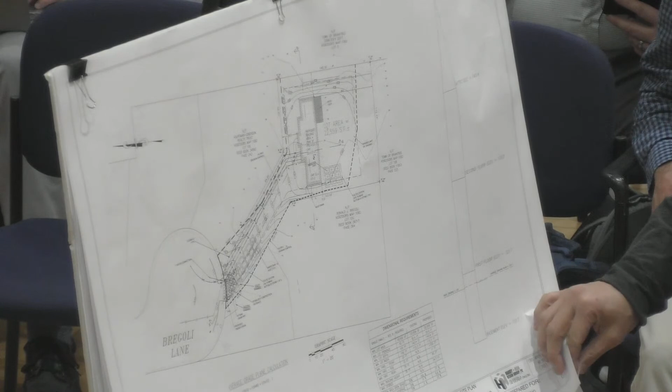From the last revisions on the original plan submitted, we have revised the site plan basically to address the DPW comments. There were a number of comments related to sewer and water connections to the site, and also comments that we need to go get a stormwater permit. So we added notes on the plans that they are required to get a stormwater permit, and we also designed the sewer and water connections.

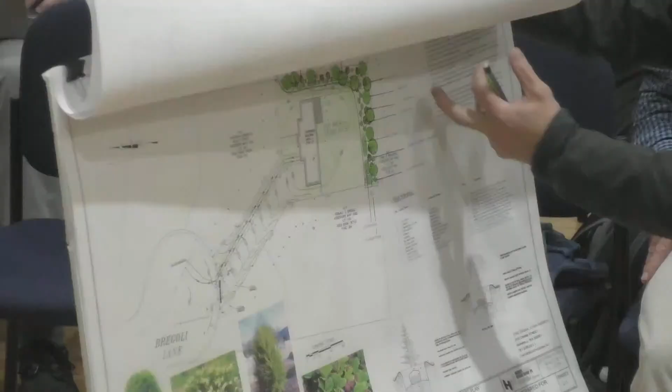As far as the landscaping plan, we have submitted a landscaping plan. On the last submittals, we quantified 19 trees being removed from the open space buffer area. In the new plans, we have added 6 more red maples, so a little bit more than the 1-to-1 ratio that was presented at the last meeting.

One of the comments we had was from Mr. McCamey, asking how big the building is, what's the square footage. Unfortunately I didn't have that number last time, but we've gone back and measured the architectural plans. The deed restriction on this lot requires a minimum 3,200 square feet of living area, excluding the garage, basement, and mechanical space. As measured from the architectural plans submitted with the application, there's approximately 3,290 square feet.

So the building itself is designed to the minimum of what is required. We are not trying to build a huge building on this lot. Just to clarify that. Other than that, I'm open to any questions the board may have.

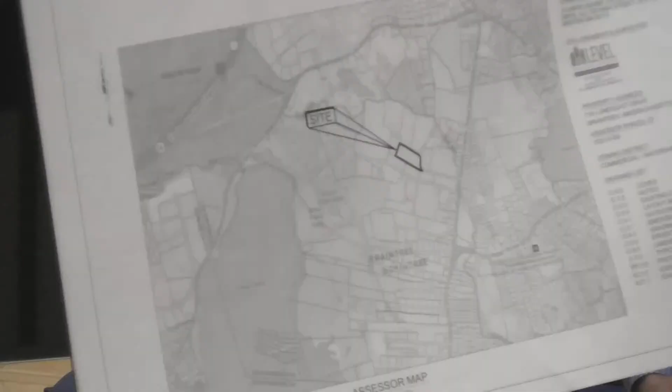It's in the commercial zoning district with watershed overlay. The property has an approximate 42,000 square foot building that was constructed in 1967, so over 45 years ago. This is the type of improvement, as the assistant director pointed out, that we like to see in these types of 1960s industrial parks. This is an improvement of the stormwater system, and also to the westerly part of the site, there is a hard-packed gravel area, and we're taking that area and paving it and installing new stormwater treatment. That area is approximately 50,220 square feet.

There's no modern stormwater management system, treatment or controls, and the proposal is to pave that pre-existing gravel packed area, install a state-of-the-art stormwater management and treatment system that complies with DEP stormwater management standards and best practices. All in all, it will be a neater truck storage and equipment storage area than currently exists, and will also protect the interests of the watershed overlay district with the new stormwater controls, infrastructure, and treatment.

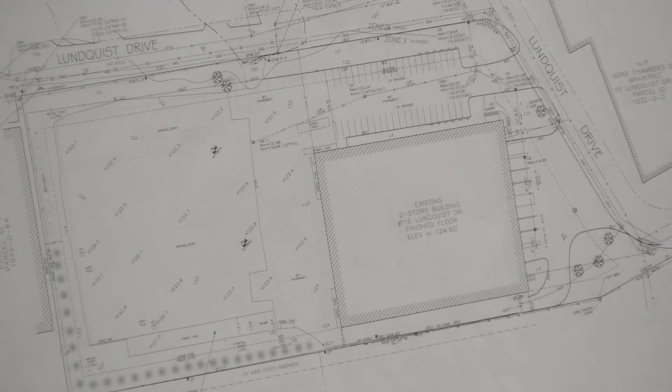So we also have gone to the zoning board, which we reported last time, and we have less lot coverage, as we showed on that composite exhibit that we had, than 13 out of the 17 surrounding properties in the industrial area. So our lot coverage is 74%. Our open space is up to 26%, which we increased from 23% with this project. That's all good, and normally in the commercial area you can cover 75% of the lot. We're still below that. It's the watershed that was adopted in '82, pretty much years after this site was used as compact area and storage and so forth.

So we did go to the zoning board. We did get that relief anyway, even if there were pre-existing rights. The fact is 60% is the new dimension in that area for lot coverage, and 40% open space. And in getting that relief, we're still superior in terms of open space and minimizing the lot coverage to the extent possible.

So I know that we had a call last week with Nick Fasendola. Nick is the project engineer from Level Design. We had a Teams call with the assistant planning director, and also Eric Dias, who's here. Eric is from Strong Point, as Mr...

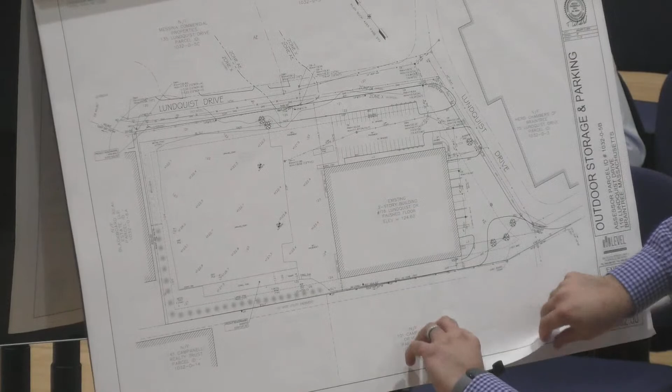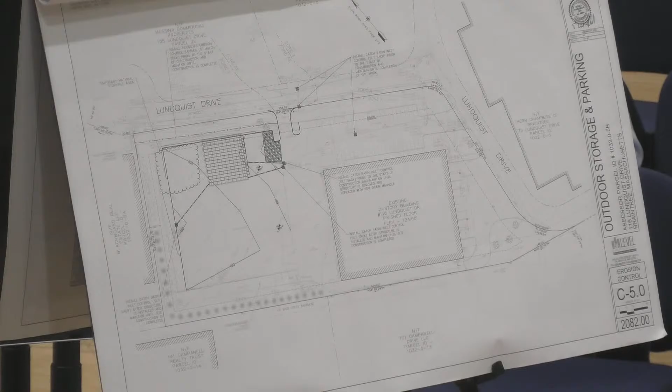In that area is the proposed subsurface infiltration system. As Mr. Dias stated, we don't anticipate any variation. The grade is very consistent throughout that level, so there won't be any huge variations in groundwater. The material is consistent from the two test pits, which are about 80 feet apart. So we're requesting that the board allow us to maintain those test pits with confirmatory inspections during the construction process.

I always require that I do a bottom of hole inspection myself on any system being installed under my supervision, so I'll be out there doing inspections when this is constructed. We'll do one inspection once the hole is prepped and any unsuitable material is removed from the site, and then I'll do a second inspection when the stormwater system components are installed. We'll do an as-built survey before it's backfilled, just to confirm everything has been installed properly at that point.

So we would like the board to consider allowing those two test pits. Other than that, there were no other items that we opposed, and we'll work on getting a comment response and revised plans within the next week or two to the board. Great, thank you.

Assistant Director Murphy, do you have any feedback on the test pit question? We discussed this, the director and myself, and we believe that a conditional test pit prior to the start of the authorized activity would be acceptable in this situation.

Thank you. Going to board comments first. Member McCamey, any questions? No questions, thank you. Member Kent? No questions. Member Grove? Thank you. Member Sterlesi? No questions? Member Conley? No, thank you. Okay, thank you. I don't have any questions either.

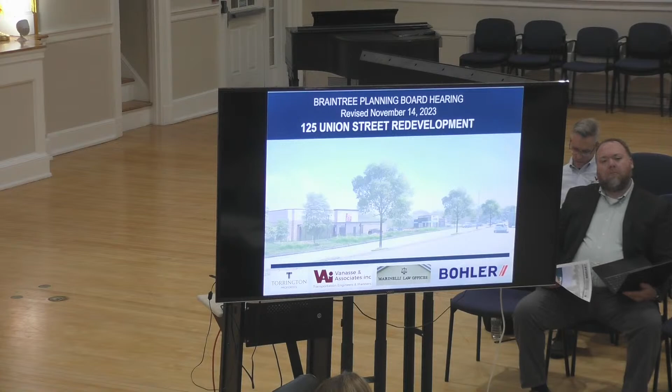The redevelopment program is less than 20% of the blighted building mass that currently exists on the site, which would be demolished when final redevelopment approvals are issued. In addition to over 650 plantings and complying with open space, the redevelopment also includes on-site drive-through stacking capacity of 55 to 60 vehicles, which exceeds on-site stacking capacity of any similar use one can think of in the area. That kind of site characteristic is extremely appropriate for the proposed use, and has stated $1 million in off-site improvements that will make the existing intersection function better than under existing conditions, as Jeff would tell you and has stated in the memos.

The zoning process is site plan review. Torrington's proposed tenants are 2 uses by right in the highway business zone, Chick-fil-A and Brookline Bank, both notable brands that Braintree can be proud of. Site plan review, per Prudential versus Westwood, provides that site plan review approval is granted for uses by right with or without reasonable conditions.

So when you look at section 601, the table of principal uses, you will see that bank is a yes, an allowed use. You will see in section 601 that fast food is a use by right, an allowed use. There is no use discretion. Site plan review, as defined by the Supreme Judicial Court, is regulation of a use rather than its prohibition, contemplating primarily reasonable terms and conditions.

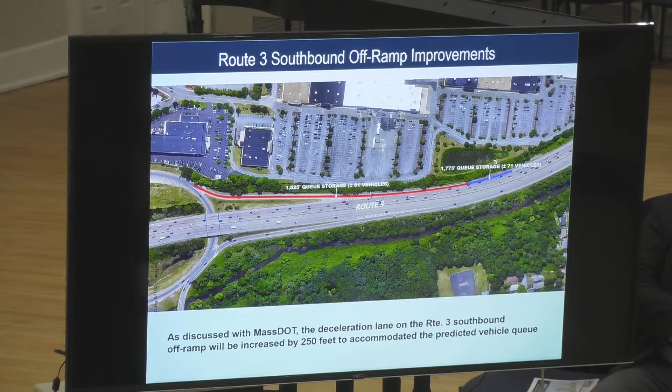So the next item as it relates to Article 14 is Condition B. Now we're moving from changes in level of service to traffic volume increases.

Condition B states that we have a certain percentage increase in traffic that is allowed on roadways that provide access to the project site. The measurement of those conditions is the same as we look at for level of service. We're required to look at no-build versus build condition, look at the percent increase in traffic, and see if it falls within the allowable range as denoted in Figure 1 of Article 14, Condition B.

The roadways that provide access to this project site we would deem as high volume roadways, so they would fall under Condition B at 10,000 plus vehicles per day. At that volume, a project is allowed to increase traffic up to 10%. That's the threshold limit.

We provided in our November 9th memorandum a detailed table that looks at daily traffic volume increases on each of the roadway segments in our study area, and you see that in great detail.

What you see in the table is that the only place we had exceedances, and again we look at the morning, evening peak hours, as well as weekday and Saturday conditions, the only time we had an exceedance was during the Saturday midday. It was not an average weekday exceedance.

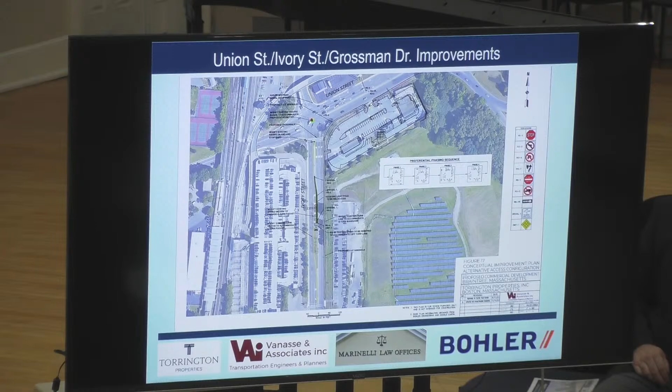Let's see if I can use this to move. So I'll come over here. The project site is here. I apologize for being in front of you. We spent a lot of time talking about these U-turn maneuvers.

Because of these U-turn maneuvers, there are 3 segments of roadway that, depending on where you're coming from, you have to traverse twice. So on a typical project, a vehicle would only pass a given roadway segment once, but because of the U-turn maneuvers here, it basically doubles the volume on that segment. It's unique to this site.

The area where we're showing the exceedance is Ivory Street, basically between Union Street and where the U-turn maneuver happens. If you're coming from the east and want to go to the project site, as we measure the traffic volume increase, you travel on this segment of Ivory Street once, reverse direction, and travel on the same roadway segment twice. So when you measure the volume of traffic, the same vehicle has to traverse it twice.

Some vehicles have to traverse those 2 roadway segments twice in order to get to the site and then leave it as well, because if you want to head back towards Washington Street, you exit the project site, traverse one leg of Ivory Street between the rotary, then go around the rotary and come back heading in the westbound direction. So the only reason we have the exceedance is because of these U-turn maneuvers, plus the fact that we have a median, so heading westbound requires using the rotary and coming back on this section of roadway.

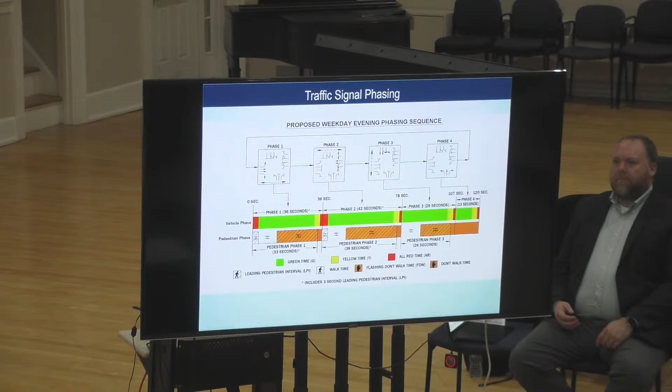As an engineer, these might seem complicated, but what I tried to do here, to the best I could, is look at various ways others might view the phasing of the traffic signal, more related to how the pedestrian phase works in relation to the entire traffic signal phasing. I tried to simplify it, and my letter describes various iterations you could look at for how the signal operates.

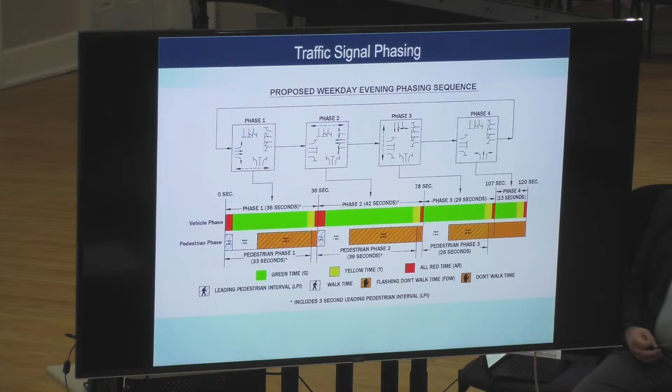The traffic signal here operates under basically 3 timing plans: a morning, an evening, and a Saturday midday timing plan. The amount of green time is different depending on the time of day the signal is operating. So you have 3 drawings that I provided for each of the time periods. This one happens to show the weekday evening timing.

These are the phases that the signal steps through. Phase 1 is Union Street toward the Rotary, which is the eastbound direction. Phase 2 is Union Street from the Rotary heading towards Washington Street, which is westbound Union Street. Phase 3 is Grossman Drive. Phase 4 is Ivory Street. The traffic signal controller operates logically, going through each phase in order: Phase 1, phase 2, phase 3, phase 4, and then back to phase 1.

Phase 1, eastbound Union Street, includes the pedestrian phase for crossing Ivory Street, which is why that happens at the same time as the vehicle movements. Phase 2 includes the pedestrian phase across Grossman Drive. Phase 3 includes the pedestrian phase for crossing the Union Street west leg of the intersection. Phase 4, Ivory Street, does not have a pedestrian phase associated with it.

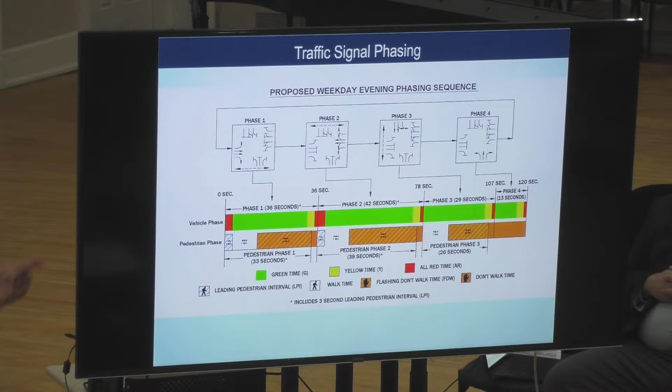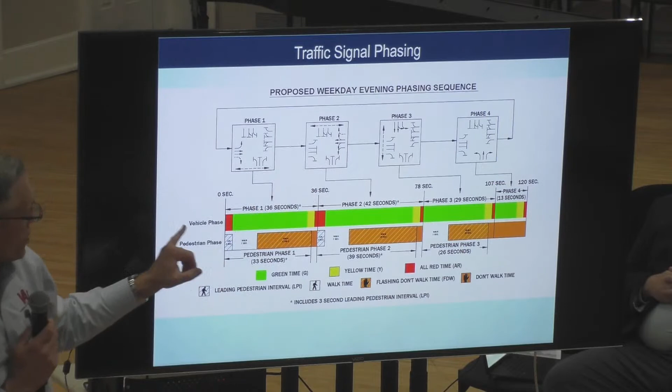When phase 1 operates, if you're a pedestrian who comes to the intersection wanting to cross Grossman Drive and you push the push button while we're in phase 1, you're going to see the don't walk symbol since it's not phase 2 yet. You'll stand on the corner at Grossman Drive and wait for phase 1 to progress. Phase 1 is a total time of 36 seconds, so you'll stand there for 36 seconds. After phase 1 concludes, the walking symbol comes up, and you'll be able to cross during phase 2.

You'll be able to cross the intersection for the full pedestrian phase time, which is 39 seconds, sufficient time to get from curb to curb, which is how we're timing the signal. Then you will have completed your pedestrian crossing.

If I'm at phase 1 and want to cross the Union Street west leg of the intersection, and I push the push button, I'll have to wait for phase 1 to finish and then phase 2 to finish before the walking symbol comes up. Phase 1 is 36 seconds, phase 2 is 42 seconds, so I'm going to wait 78 seconds before I can cross the intersection.

You can look at various iterations of when you push the button and when the phase comes up allowing you to walk. All you need to do is add up each of these times to determine how long you have to wait at the intersection. The important thing is the longest wait time is about 82 seconds, something like that, depending on where you push the button and the combination of phasing that happens.

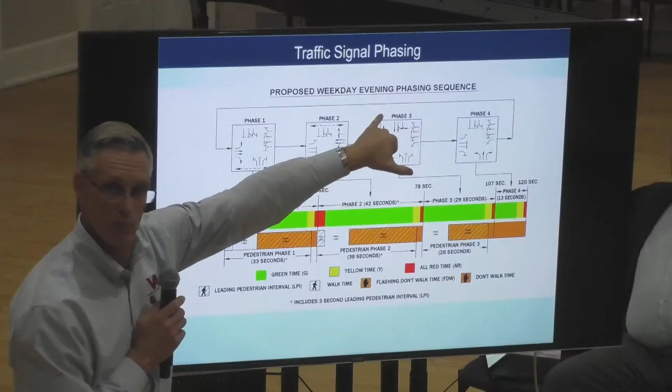One thing that's important to mention is if you hit the intersection at the right time, say I wanted to cross from one side of Grossman Drive and then come across the intersection. If I get there at the right time, in phase 2, and push the button, I might be able to walk from here to here, then push the button again and get across the intersection. There's a possibility with concurrent pedestrian phasing that, depending on where you're going, it's quicker to get through the intersection than if you used exclusive pedestrian phasing, where once you cross one leg, you can't cross again until it goes all the way around to the beginning of the cycle. Whereas in this situation, there's the opportunity for a shorter wait time to cross the intersection.

Again, we provided these same diagrams for each of the peak periods so you can look at various combinations, add up the time, and figure out how long it would take depending on where you push the push button in the signal cycle.

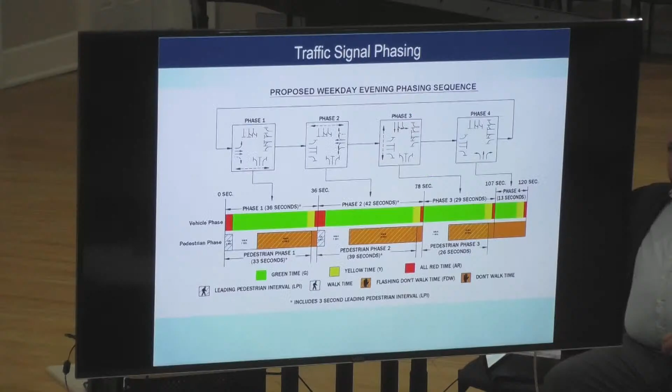So that concludes the new information that we provided, and I'd be happy to answer any questions you have now or later on this evening.

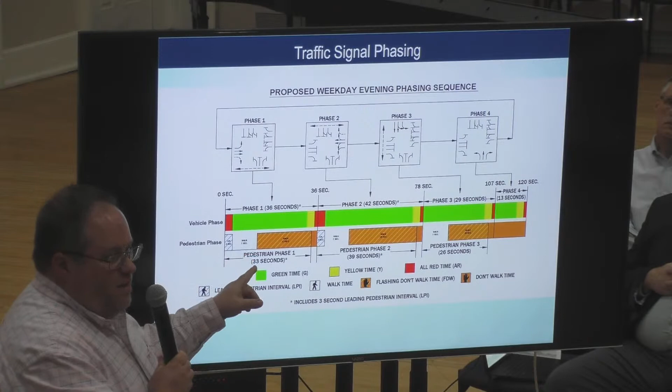I'll just go over here and point something out. What's important to understand is that these white spaces represent the walk phase for each approach. That's the point where the walk signal comes on if you push the button for that approach. So it's wholly dependent on where you come in on this timeline—think of it as a continuously running timeline. It depends on when you push the button and how that relates to the specific walk phase for the crossing you want to use.

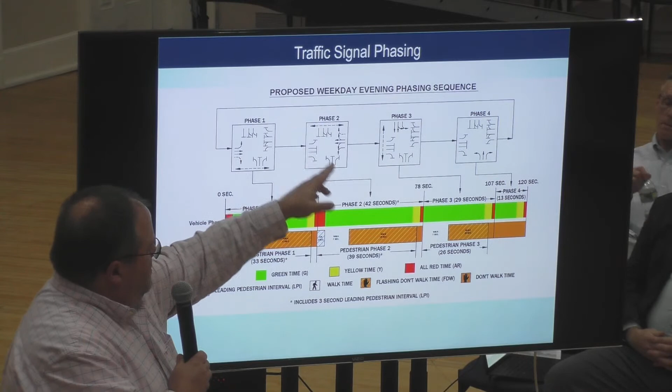For the letter regarding the Article 14 compliance, it was well stated how you would approach this, and it was true what Jeff said, that I would approach this the same way any competent traffic engineer would. When you're looking at an intersection with capacity issues and you're retiming and balancing that capacity, there may be approaches that don't necessarily have a capacity issue, where you might slightly degrade level of service because it operates acceptably today. So that balance could be some gain, some degradation, but overall gain. And that's what's happened here.

The information presented in that letter is consistent with the information presented in the traffic study, the information we had previously reviewed, and is accurate to the impact of the project. As far as the overall increase over 10%, also accurately stated, and the mitigation measures can help reduce that impact. We're talking about small numbers in terms of what it would take to reduce that below the 10% threshold. So we didn't prepare a formal review memo for this because there wasn't anything to comment on. We were in agreement with things presented, and I hope my explanation helped provide some more clarity for the board, but I'm happy to answer any questions.

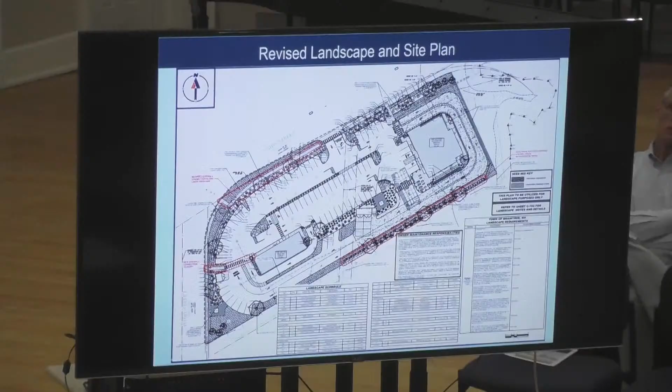From my perspective, I'd rather see easier pedestrian access than the landscaping, although I like the landscaping. Is it possible, even if it's not put exactly where the landscaping is, sort of behind where the dumpster is going to go, to put another sidewalk in there? Or does the bank drive-through make that problematic?

Yeah, you're right — the bank drive-through wraps around the south side of the building, and you also have the double drive-through queue for the Chick-fil-A. We don't want to enter more pedestrian activity through that queue, just because you already have the vehicles there and employees doing remote order sessions. So the intent is to keep the flow directly through the parking field, straight to the front door as quickly as you can.

Before I move on to questions, does anybody else from the applicant team have anything, or should I move on to questions? I think we've provided everything that we have. Okay, thank you, thank you.

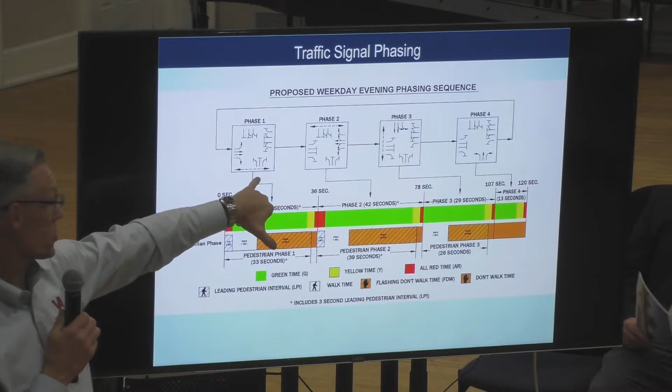Okay. Where is Ivory Street in this? Yes, originally. So north would be straight up as you're looking at these. So Ivory Street crossing occurs during phase 1, when the eastbound Union Street movement is happening. Okay, so I looked at this wrong. Yes, I thought Ivory Street was phase 4, but okay, I hear you.

Okay, how long is the pedestrian light? Is it 30 seconds? The total time that a pedestrian has to walk is 33 seconds for that phase. So when the number is flashing, what number is that? You're going to see it count down for 33 seconds. I'm going to see 33 seconds? It's going to slowly step you down to 0 starting at 33. I'm going to see 33, which seems unusual to me, but okay, 33 down to 0. Yes. Got it. Okay, thank you.

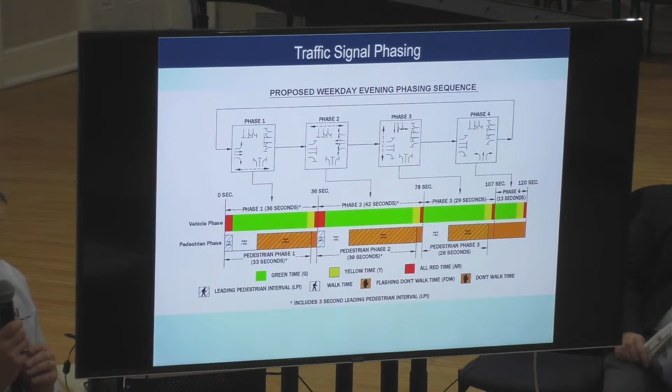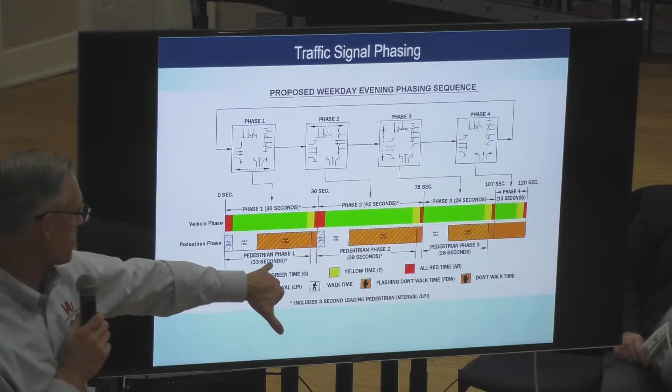And so are all these lights 33? No, because it's 33 for this one. The total pedestrian time for phase 1 is 33 seconds to cross Ivory Street. It's 39 seconds to cross Grossman Drive because it's longer and wider. And then it's 26 seconds to cross Union Street because it's shorter. The width determines how long it takes to step from curb to curb, so as each length gets wider, you need more time to cross. That's why the phasing time changes. Okay, that actually was the number I was looking for last time. Okay, 33 seconds, perfect. Yes, thank you.

And if no one hits the pedestrian walk button, what happens? It just stays as the don't walk. Okay, no, I understand that, but in terms of the lights and the sequencing for the traffic.

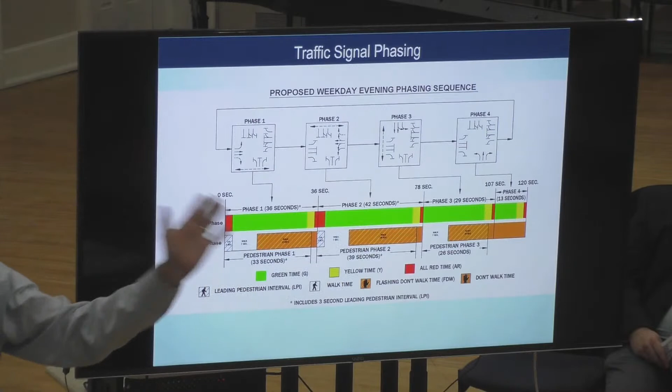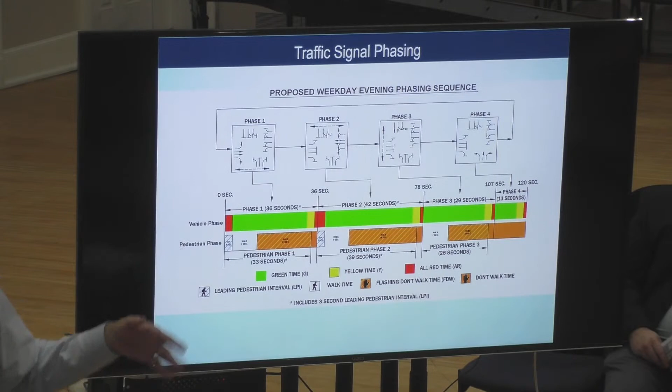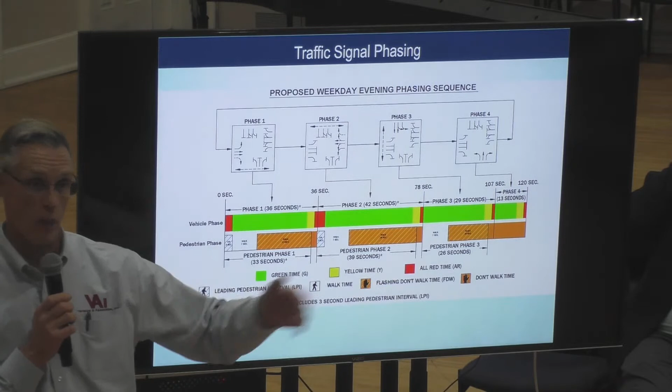So what you would look at is that if there's vehicles always at the intersection, there's always somebody waiting, this is how it would work. Because the signal is dynamic, it will change. So if there's a condition like right now, let's say, and there's not a lot of traffic coming out of Grossman Drive, it will keep the green on the approach that has demand. So if there's always traffic on Union Street, it will stay green on Union Street until a car pulls up to Grossman Drive, and then it will detect the car and say, okay, there's a car waiting, so I'm going to move myself around and call the Grossman Drive phase.

So what can happen is if a pedestrian doesn't push the button, and there's also no traffic coming on Grossman Drive, it'll stay green on Union Street until a vehicle pulls up and is detected by the traffic signal. So this, when you're looking at this, is basically the way the signal would operate during the morning rush hour, when there's traffic all over the intersection. When it's not a condition where there's always vehicles on an approach, it stays green until a car comes up or a pedestrian pushes the button, and then it reallocates the time. So if 36 seconds aren't needed, whatever time is not used goes to the next phase. That's the way it works.

Okay, I was actually looking more at the evening phase, but that's okay. So, alright, so we understand the phasing. So what you're telling me, and tell me if I'm incorrect, is that this is the way the signaling would work for pedestrians walking. Correct. But if nobody hits the button, the light sequence for the cars could be slightly different. Exactly.

If you stood out there with a stopwatch and tried to replicate this, you probably wouldn't, because the signal is dynamic. And so the other thing that it does is if there's only 10 cars on Grossman Drive, let's say, it's only going to give enough time for those 10 cars to get processed.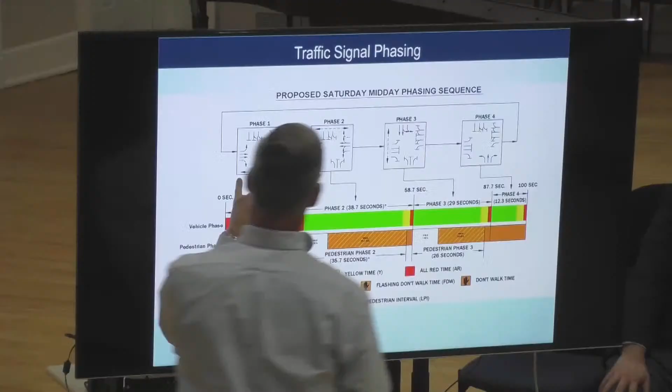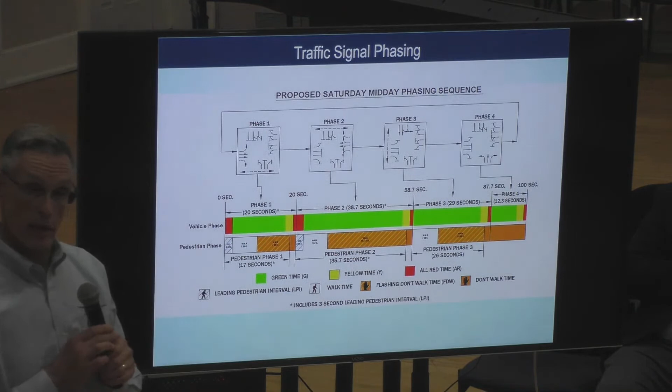Sure. So what we had talked about was, because when we have these concurrent movements happening, one of the things we discussed was a dynamic sign that would say 'no turn on red' when the pedestrian push button is activated. That can be added into the signal phasing or the signal system, so that if no pedestrian pushes the button, it just allows those right turns to happen. But if a pedestrian pushes the button, a blank-out or fiber optic sign comes on that says no turn on red when a pedestrian's there. That's something that can be incorporated into the signal system and activated when a pedestrian pushes the push button.

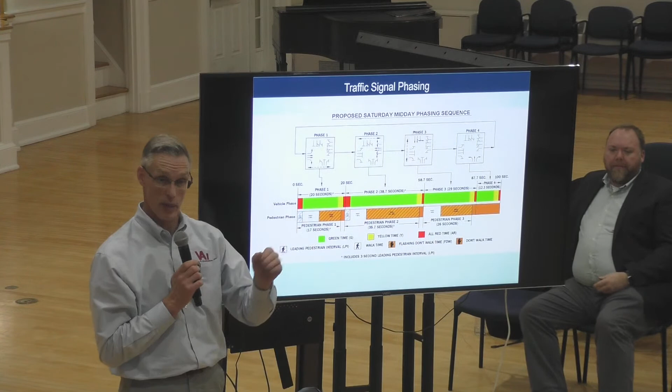Okay, and then that's something different than just making it always no turn on red? Exactly -- it would allow right turns on red to occur, except in the instance when there's a pedestrian crossing, in which case the sign would light up saying no turn on red because there's a pedestrian crossing. So that's an option that can be added into the signal system. Okay, all right, thank you.

What else -- I had one more question on the sidewalk extension. I know there were some comments on that -- it requires coordination with the town because it goes over town property. I just wanted to see if you could explain how that typically works, like the process of understanding the sidewalk and getting whatever approvals are required. So I think it's really not uncommon.

It's similar to if a sidewalk's on private property where there's an easement granted for that to take place. So in this case, for the developer to construct the sidewalk, we would need permission to enter upon town property to construct the sidewalk. And to the extent that a different town entity may own the sidewalk, they would need to grant an easement to allow for the sidewalk to be constructed on that property.

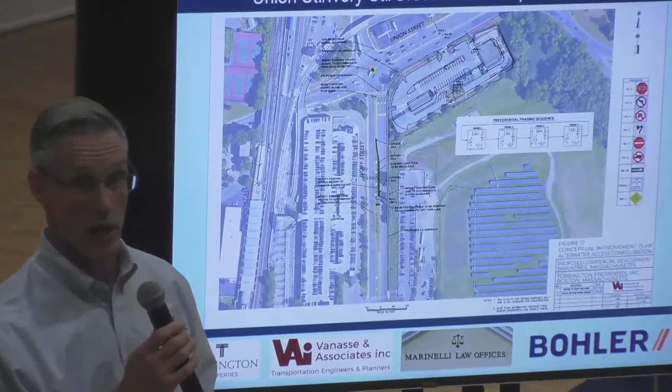So it's really about the town granting easements to allow for this work to take place. Okay, all right, thank you. I think that's my only question.

I also appreciate the significant amount of additional information that was presented and the explanation of how it all works together. I think all of us agree that the traffic is the biggest question in this, and trying to understand what that means and what our concerns are.

I guess at this point, this is a public hearing. I'll ask if there's any public that would like to comment, and if you want to come up and just give your name and address.

Good evening. For the record, my name's Bob Durgan. I live at Totnes Road here in Braintree. I'm the gentleman that asked about Plan B a couple times now, and to be honest, I don't think we have a Plan A that works.

Having people go down and take a U-turn in front of masses of people that are getting off the T, or sending 100% of the people who exit the Chick-fil-A and the bank have to go back around the Rotary, and you're going to tell me this isn't going to impact traffic for 7 years? It's already impacted. And the idea to take time from across where we just put Burlington Coat Factory, Amazon Fresh, and now with whoever knows what's going to go in that area, it's not going to work.

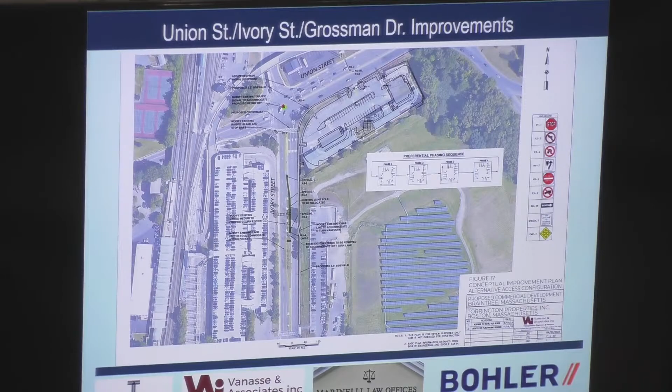And we've had some conversation about the landscaping, and you can see all the street trees that are there. So from the standpoint of this project and what we're trying to achieve, in working with staff, it was really about sidewalks on both sides, which allowed for the connectivity to take place. But to the extent the town were to advance a shared use path, that would happen on the MBTA side, and we've committed to designing the intersection improvements so that a shared use path could connect up to the signalized intersection with widened sidewalks and curb ramps to accommodate that. So we're going to design for it at the intersection, and it would happen on the MBTA side.

Okay, Director, would the proposed new U-turn limit any ability to add the shared use path or the sidewalk, or do any of these suggested improvements make it more difficult, more expensive, or anything along those lines?

They do not preclude the construction of the shared use path. I would say the improvements at the intersection will save money, because when we build it, we'll build in the ability to link it right up to the new sidewalk we're going to construct on the southwest corner. So designing the signal and building it that way would actually save money, since you just connect into it.

Okay. And Director Santucci-Razzi, did you have another question on that? Again, thinking out loud here.

To Mr. Dirk, we can't fit a sidewalk in with a multi-use path, correct? No, you'd put them together. We have the multi-use only on one side. Right, and then essentially the entire roadway would be realigned, or?

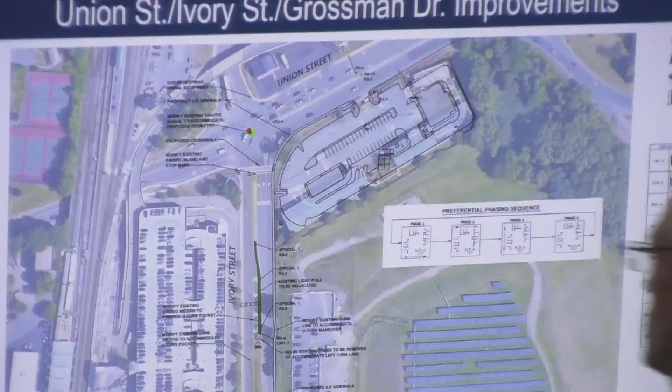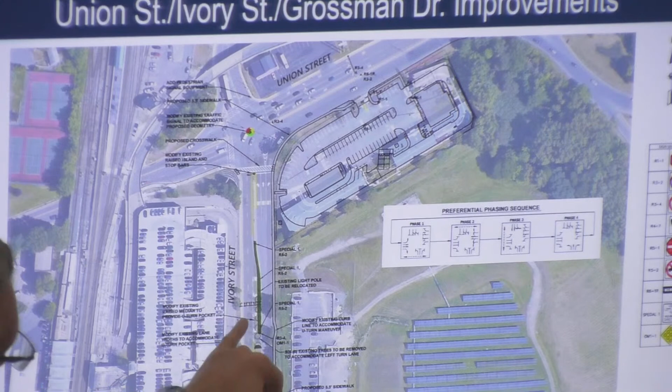And would we lose the median, the green space? I think you would need to build it entirely on the MBTA side. So where you see the trees and everything that's there now, you'd end up taking the trees down and pushing it that way, because that's the only way you're going to fit that in. You could not realign Ivory Street in this area because you're too close to the intersection—you've got basically fixed points with the signals on either side, so you can't make changes in the middle there. You'd end up cutting into the green space on the MBTA side to get the shared use path in place.

Would that be something that the alternatives could be designed while you're looking at the sidewalk, just so we could understand? I guess it's sort of a two-part question: whether the applicant would pay for the shared use path, or whether the actual design putting into place any of these upgrades would make that more problematic, to be able to understand that better while the sidewalk's being reviewed for the opposite side. I'm not sure if that question came across particularly clear, but.

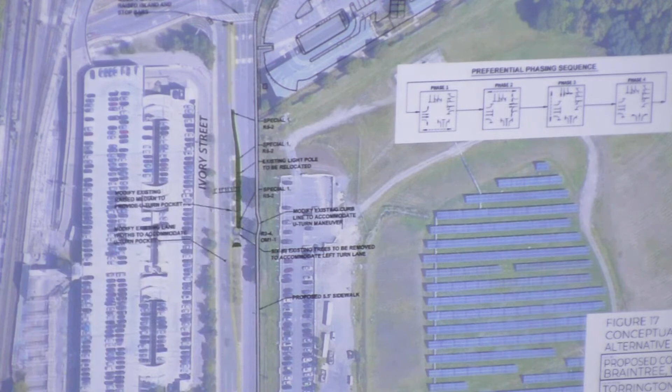I think there's nothing we're doing here that precludes the ability to construct the shared use path, because the curb-to-curb width isn't going to change. What you'd be doing is work on the MBTA side, but it would occur outside of the traveled way. The lanes are already at minimums, so we couldn't take away any lane width or drop a lane just because of traffic volume. So you'd really just be doing work outside of the curb area on the MBTA side. However, when we're constructing this corner of the intersection, we can design it so that the shared use path would come into the crossing at the signalized intersection, because otherwise you'd need to rebuild that corner to accommodate the connection.

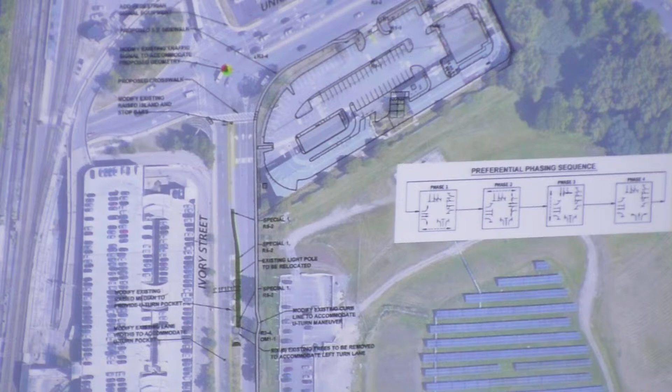Connor, yep. We actually worked with our engineering department at the beginning of the month and asked them to provide the road layout for Ivory Street to the applicant team. The back sidewalk on the MBTA side is actually the property line, so that's where the road layout technically ends. We would not only need an easement from the MBTA, but we'd be further pushing onto city property there. On the other side, on the landfill side where the fence is for the park, it's about 5 feet from the edge of the roadway, and that's the property line. So the street itself, in the drawings we received, is about 80 feet in length, so constructing a shared use path on either side does pose certain challenges. Thank you.

Okay, so I guess at this point, sorry, go ahead. For staff, is the satellite lot a permanent lot, or is that temporary related to construction?

The one at the people's parking lot? The closest to the landfill. That's Braintree temporary, so 5 to 25 years. No, okay, seriously. The T keeps adding projects, I guess, to the garage. I'm not sure what's going to happen with that. I couldn't answer that question. We can find out, though.

And then as a follow-up to Councilor Barrica's questions about encouraging staff to potentially bike to work, within buildings a lot of times you would include something like a shower room so that if you were to bike to work, you had that option.

Yes, and through the chair to Member Conley and the Councilor's comments as well, if the board is supportive of this and directs staff to draft conditions, we will be putting together some different TDM requirements. We recently did some TDM requirements on the special permit for the parking reduction down at the landing, so we can use that as a model.